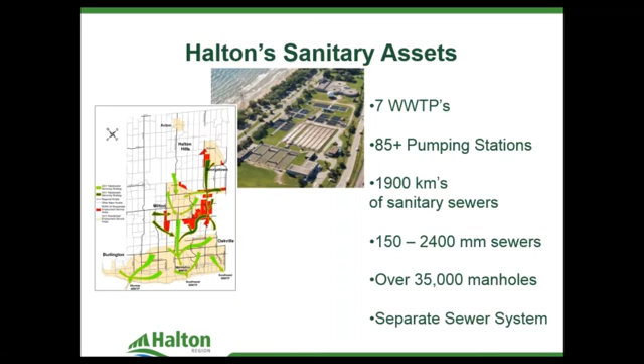So in Halton, although effects of climate change continue to affect all of us, basement flooding is not a new phenomenon, and it has caused a lot of devastation to homeowners and businesses for decades now. We've experienced basement flooding a while back, and since I've come into the region in 2005, I've taken over the group that has to do with basement flooding. But basement flooding is also part and parcel of inflow and infiltration control.

So inflow is basically the fast response of rain that gets into our collection system. So, for example, there's those holes in the sewer manhole lids. So when it rains, water enters the system really quickly. Or if there are downspouts from the homes that are directly connected into our sewer systems, water enters the system directly. So it basically gets onto the roof, down the spout, and then into our system. So that's what we call inflow.

Infiltration is the slower response time of water that has to pass through the ground before it penetrates the pipes and gets into our system through cracks and holes, things like that. So those are slower response type of action. So we've had a team created or developed since the 1990s. We recognized that there were a number of storms that hit in the 1980s that caused basements to flood. And by the 90s, Halton Region recognized that there was a need to put some staff directly committed to trying to deal with the flows that get into our system.

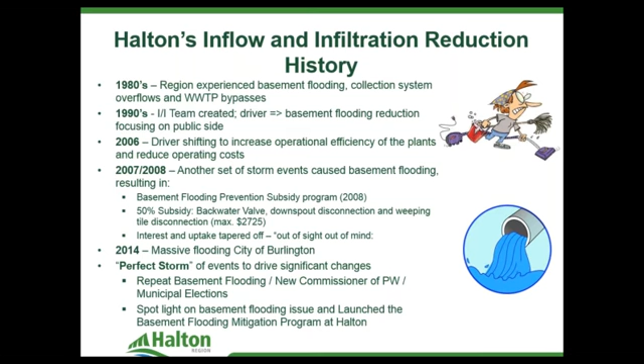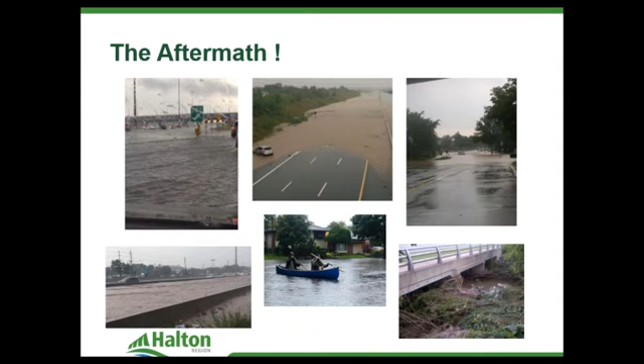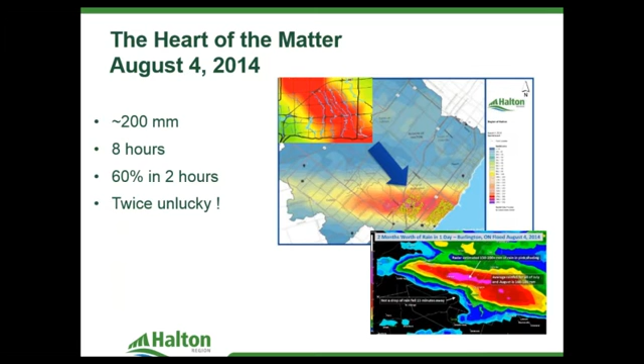So in terms of comparing that storm to some of the other historical events, and many of you in this industry are obviously aware, Hurricane Hazel in 1954, there was 48 hours of this storm. It lasted for a while, and it had basically dropped 280 millimeters. Harrow, 1989, lasted for just over a day and dropped 450 millimeters. There's a northwestern Ontario storm, 2 days of 400 millimeters.

And we also put in here the May event for us that was only 5 hours and dropped 23 millimeters, and it still caused some basements to flood. So when you look at that and compare that to intensities, so if you're looking at intensity, you're comparing basically the amount of rainfall that fell in a specific amount of time.

People obviously remember Hurricane Hazel, and they remember some of the huge storm events because there were devastations all across a number of areas. But in terms of intensity, if you look specifically at the 8-hour duration, Halton Region, we basically exceeded that of Hurricane Hazel and Harrow at 25 millimeters per hour. So it was coming down really quickly, really hard, and really fast. The intensity in the 3 worst hours was closer to 50 to 60 millimeters per hour.

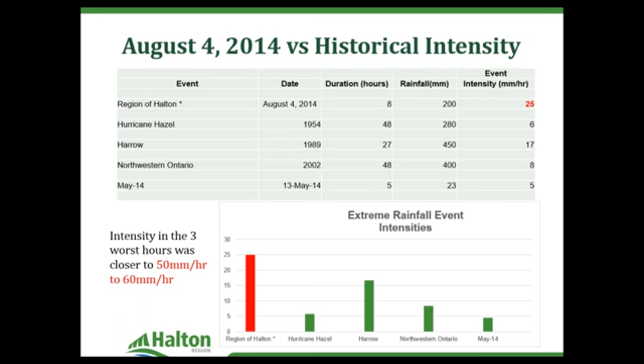So what did we do? Well, when something like that happens, it's basically all hands on deck. I recall that day because I was in Mississauga. I looked in the skies and I saw this huge black cloud, and I figured, oh no.

And then I went home and I started getting phone calls from my staff who live in Halton, who were telling me that their basements were starting to flood and all of that, and I didn't realize the real impact until the next day when I came in and everybody was basically dropping their regular activities to help and deal with the flood.

We had over 6,000 phone calls that came into the region, and they reported some sort of flooding. So this could be their basements backing up, or water coming in through their windows, water coming in through their doors, just some sort of flooding. So we had 6,000 calls. Over 3,500 of those were related to their own homes being flooded.

And we gave out approximately 2,200 ex gratia grants for a total of over $2 million. For those who are not aware, we in the region have a program where we provide ex gratia grants to homeowners who have experienced some sort of sewer backup. It's $1,000, and the purpose of this is really to help owners offset the premium when they have to get insurance coverage for it. So typically there's a deductible, or there is a cost, and so that's the region's way of helping out the homeowners when there's a sewer backup.

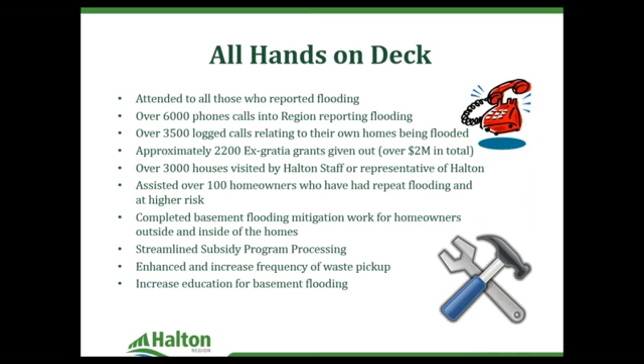So based on all of that happening and the devastation, council immediately gave us the direction to go out and try to find what are the causes, looking at a fulsome review of our own sewer system as well as the private side.

So looking at finding the causes and remedies, we retained a consultant company, and they basically used a clean slate approach of looking at everything from scratch, looking at contributions from blockages to capacity limitations or restrictions where there could be efficiencies made, looking at the contributions from the private side, what typically happens. So they came on and they reviewed all of our previous work, and based on some of the work that we did,

we moved and had a strategy. So moving forward, a strategy for basement flooding. But they also gave us a recommendation to look at our work in terms of phases. So dealing with the immediately affected homeowners and residences in Burlington as our first phase, our high priority, and looking at the region as a whole as the second phase. So once we got an idea of how we're going to deal with finding the causes and the solutions, leveraging that for region-wide as well.

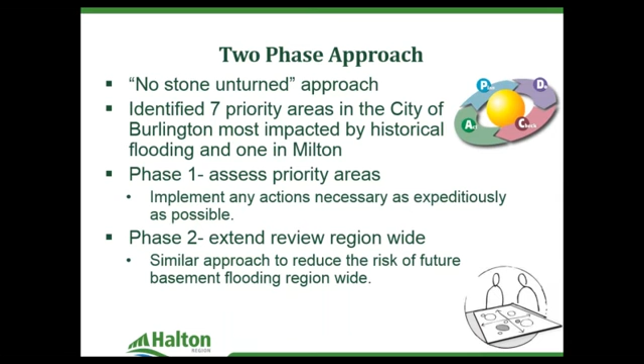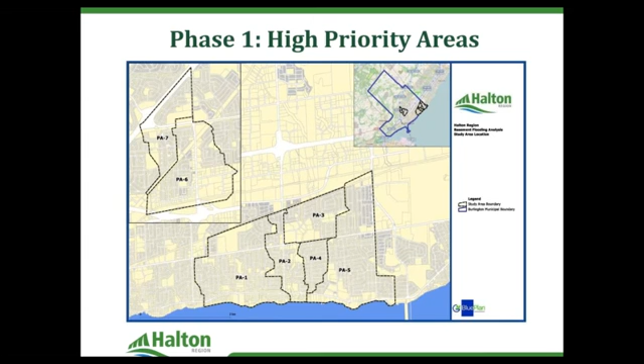So what did we find? Through our desktop study, and it was a lot of desktop review, we have a really good sewer inspection program at Halton Region. We do a TV inspection of all of our sewers, so we know what condition they're in. We also have a GIS of our entire network and a hydraulic model. So using all of these different tools and data, we basically found that the sewers were generally in good condition. The sewers were designed the way that they were intended to be used. There were no big gaping holes. There were no big obstructions, because we want to make sure that there is nothing on the public side that added to any of the homes that had basement flooding.

So there were some opportunities to enhance or optimize the system. Pipes are not free of defects, meaning there are going to be some cracks, some deformations or things like that within the pipes and the manholes. So based on the review, there are some opportunities where we can make those areas tighter. Now, when I say tighter, the design of sewers actually accommodates some water to get in. In the design of sewers, there's a recognition that there's no way you can keep all water outside of the pipe. So there's a factor that is used.

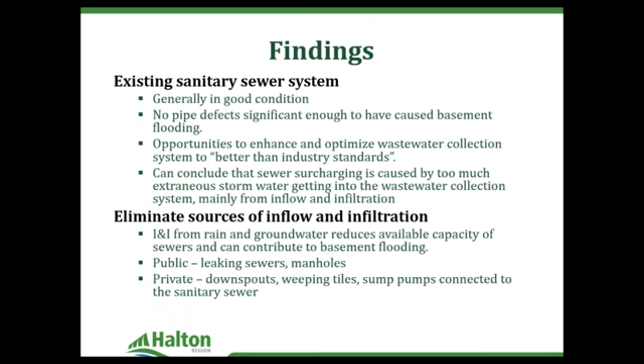So the recommendation that came out from phase 1 is basically you need to go out and optimize the public side sewers, and there was basically $3.2 million worth of works immediately identified to seal up our system where we can, either to use a liner or to dig it up and put new pipes in there.

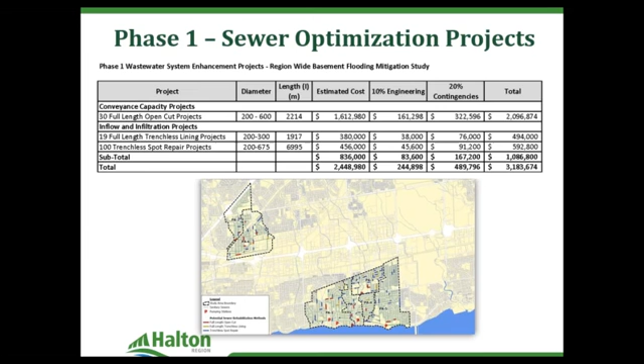Because we were given the direction to get something done immediately and quickly, we were given an assignment to have a consultant go out to the homes in the high priority areas, knock on their doors, and ask them if they want to disconnect the downspouts. We would do it completely at our cost, so no cost to the homeowners, and we actually had the consultants carry a contractor who did the work. So it was trying to make it as easy and simple and at no cost to homeowners as much as possible.

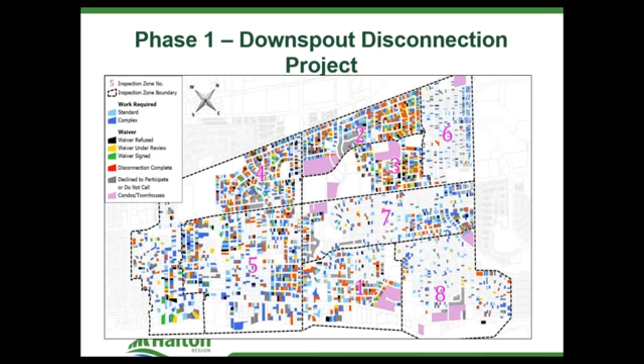Yeah, I think it's going. I have to point it.

Okay. So phase 2 is basically taking what we learned from phase 1 and making it region-wide. There is a sewer system optimization capital program. So doing the desktop study, using what we have in terms of our database, and trying to identify projects to seal our system as much as possible for the entire region. There was an enhanced basement flooding prevention subsidy program. So now moving away from just the 50% that was not getting a lot of traction, we were given the authority to make our program 100% for most of it actually. And I'll get into that a little bit later.

We also took the lessons learned from the first project of going around disconnecting downspouts. There needs to be a little bit of encouragement to homeowners. Just because you have a program out there, the uptake isn't going to be as much as you think it is. People will still shy away from getting work done unless somebody is there to guide them along the way, tell them that there's no financial cost to them, and for us to go and do it for them. So we have a targeted downspout disconnection component, where we go into different municipalities where we've identified there could be a greater chance of connections, and target those areas to disconnect downspouts.

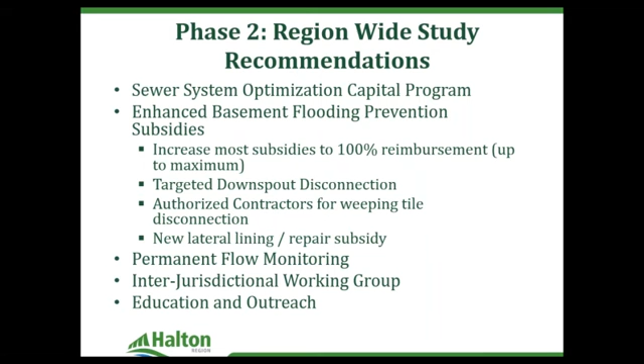So talking about some of the program here, the sewer system optimization is basically a 10-year program identifying approximately $6 million a year just to go out and deal with the sewers that have some minor infiltration coming into it. So that's pretty advanced and beyond, like I said before, the standard of the industry. It's over 10 years. It basically has been identified desktop by consultants, but each and every year we go back and we validate, we look at those projects, and we do coordination and alignment with our own projects as well as the other capital work that happens.

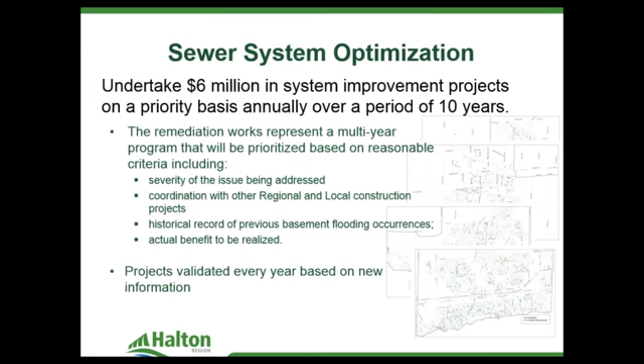So getting a little bit more detail with our Enhanced Basement Flooding Prevention Subsidy Program, there's 2, I guess, amounts in terms of the subsidy. One is 50% and one is 100%. The 50% is provided to the backwater valve and the lateral lining and repair. So the backwater valve, we have not changed the amount and the subsidy percentage for this. It's $675 per house, so it's 50%. So backwater valves we've found to be in the area of $1,200, $1,300, $1,500 to install. So 50% is approximately $675.

This was determined way back. It needs to be building code approved. It must show that weeping tiles are disconnected. So this is an important area here. The backwater valve, we basically determined that it is a device that is helping the homeowners not have water get in. But as a region, our main goal is not to have water get into the system, as opposed to providing the homeowners with the mechanisms of just protecting their basements. So that's why we didn't increase the subsidy for this component. The backwater valve is good, but if you don't have a surcharging system, the backwater valve won't be needed. So that's where we focus more of our attention, to get water out of our system.

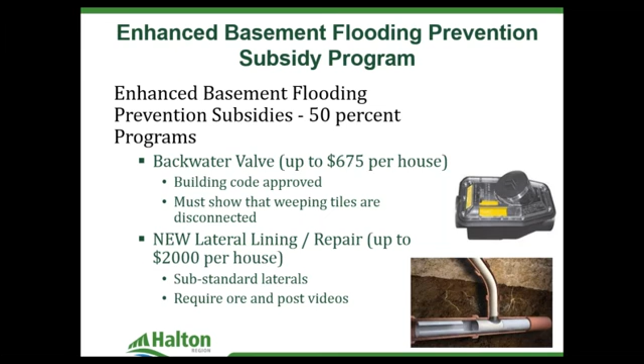The other two components of the program are 100% provided in terms of subsidy: the downspout disconnection, which is up to $500 per house, and the weeping tile, which is up to $5,000 per house. So, although it did mention the target downspout areas, anybody in the region who wants to disconnect their downspouts, we would provide the subsidy too, not just in areas that are higher priority, or that we deem as directly connected to the sanitary sewer system.

The weeping tiles, as I mentioned, we have a new contractors list. The costs will be paid by the homeowner, and then it's one of those subsidies where they do the front end costs, the work, submit an application, and then we will reimburse them for the amounts eligible. Any ballpark of what the average cost of that is? Of the weeping tile disconnection, we've basically thought it's 5,000 or so in a standard one, in a typical.

Just so the work that you actually do in a standard one is basically you go to the part of your basement. It should be unfinished, right? So looking at an unfinished basement where you just break open the concrete, you find the pipe that is from your weeping tile to your floor drain, because that's where we find them typically. You cut that pipe, you put in a sump pit, and you put in a sump pump. And then you take the discharge of the sump pump through your basement walls, through and to the backyard or somewhere that you can discharge appropriately. So that type of work is $5,000 or so.

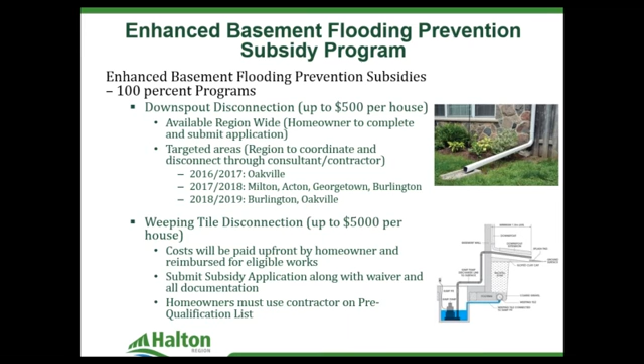And again, you talked about the weeping tile contractors. We do a screening. We review their criteria based on experience with the work, the type of work, that they're licensed, that they have a history. We also, at the advisement of our legal, we've put in a process to suspend or remove a contractor. So making sure that we have the contractors who are good and stay on the positive side. And with the application, we've also included a customer service survey.

So as part of the subsidy, for you to get the money back, we want to hear back from the homeowners. How did the contractors do? How did they hear about it? Some of their feedback, their satisfaction. So we're trying to incorporate some of the customer service into our subsidy program so that we can obviously continue to improve on it where we can.

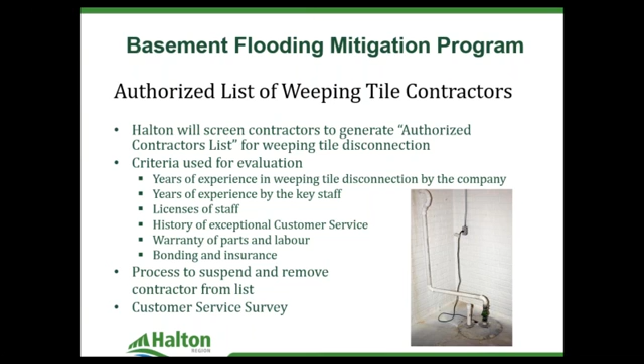Flow monitoring, as I talked about before, we have a number of flow monitors already. That's the black, but we're going to continue to increase our monitors in the system with the red and green. Now, flow monitors are very important in terms of trying to quantify and understand what the benefits are based on the disconnections or the capital works. So if there's a lot of disconnection, you want to measure the flows that are getting into the system before and after. So the flow monitors have been installed and continue to be installed.

One of the most difficult things, however, with flow monitoring is that you never get two storms alike. So they're always different. They hit different areas. They have different intensities. They last for a different amount of time, and they travel differently. So it's very difficult to say that you're comparing apples to apples, but if we're comparing similar numbers or similar storms, that's better than nothing.

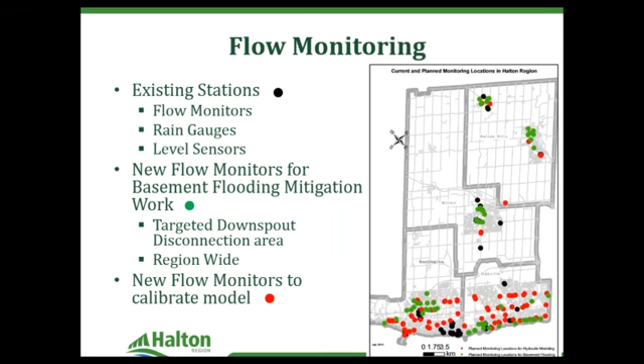Then with our basement flooding mitigation, the interjurisdictional working group, we've met a number of times already with our local municipalities and the conservation authorities. We've started to share information. We have some work that the City of Burlington, Town of Oakville have already initiated, and we're continuing to partner with them. For example, Town of Oakville with their master plan review, we're helping them. We're inputting into some of the areas that we have determined as higher flooding risk based on direct connections. And then also with Conservation Halton, where they've had a project to enhance their rain gauge network, so we're helping them with that. So it's bringing all the members together at the same time.

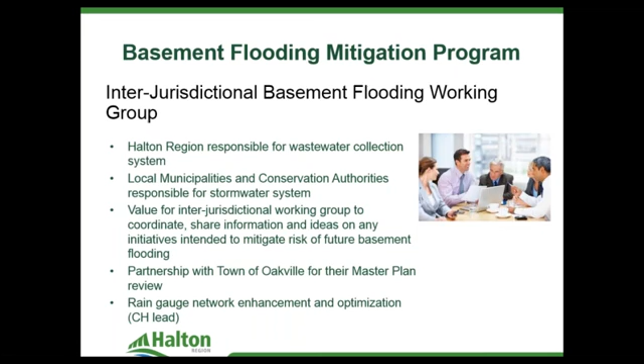In terms of our education and outreach, as I mentioned, we've created a guide to flood prevention and recovery, and that's not just to do with what you should do to prevent basement flooding, but it's also, as I mentioned before, about some of the precautionary methods if you have a flooded basement, what you should not do. Contact these people. Don't get in there. Make sure that you have gloves on or boots on. Don't get yourself in danger trying to get into areas that you should not be.

What we want to do is obviously maximize our voluntary program, and we're going to create our own outreach, going out to fall fairs, doing different events, communicating with the community. The homes, as we've confirmed, where there's more susceptible basement flooding are in those areas that have older residences, and they don't have access to internet, so we have to go out there. We'll go and do community outreach.

And so in terms of lessons learned, we feel confident that the work that we've done will mitigate basement flooding. So we have made our system better. We've gone out there and reduced the amount of water that's going to get into the system, and for some smaller storms, we probably will be preventing some basements from being flooded.

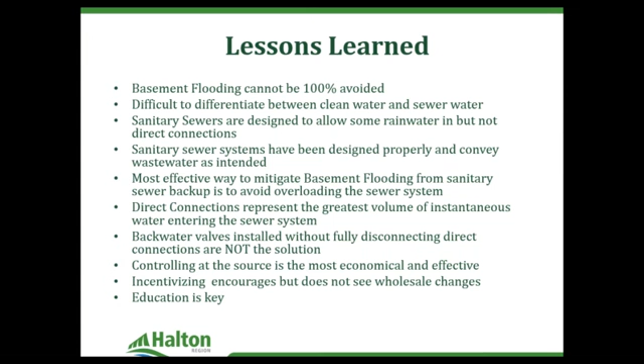And that brings me to the end of my talk. Okay, great. Thanks, John. We actually have quite a few questions from our online attendees. We've got about 50 people online. Actually, quite a few technical questions from our municipal participants.

So, one interesting thing I think we can take away from this is the fact that in your case, in Halton Region, you found that the public side was not the issue. It wasn't failing sanitary sewers or sewer systems that caused the problem. Most of the problem occurred on the private property side, and this is where you emphasized the work going forward, and I think that's an important takeaway for a lot of people.

And one question that came up online here is something that I think a lot of people think about. What some people online may not know is that in municipalities where you have upper tier and lower tier municipalities, like in Halton Region, there's a few of those around Ontario and in other parts of Canada, you have a division of responsibilities for stormwater and wastewater. You're with the Region of Halton, the upper tier municipality, responsible for wastewater. And in your jurisdiction, the local municipalities, Burlington, Halton Hills, Oakville, they're responsible for stormwater. Is that correct? That is 100% correct.